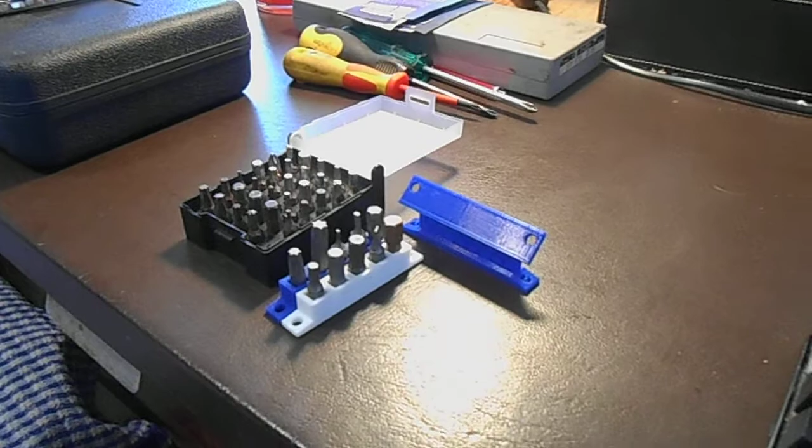Now all I'm saying is people say things like, oh, I could do that, but I haven't got the time. With 3D printing, time is the commodity. Time is what you have to spend, because time is experience.

Getting 2 extruders to work is going to take you ages. You've got to figure out how to... I've burned a whole roll in 1 week. And you might think that's not much. That's huge. That's a huge amount of printing.

See these 2 bottom boxes? They're full of models. Both of those big ones at the bottom, the one with the black base and the one above it - the one above it's only about quarter full, but the bottom one is chockers with little models. Every one of them's 4 hours, 8 hours. This big one here, they took 10 hours. This one here took about 5 hours.

Now I'm not trying to deter you, I'm trying to educate you. If you're in Australia and you're doing 3D printing, they'll have you believe they're giving you all these huge models, and they're making out like, oh yeah, just get on there and knock them out. You know, print yourself a Ferrari.

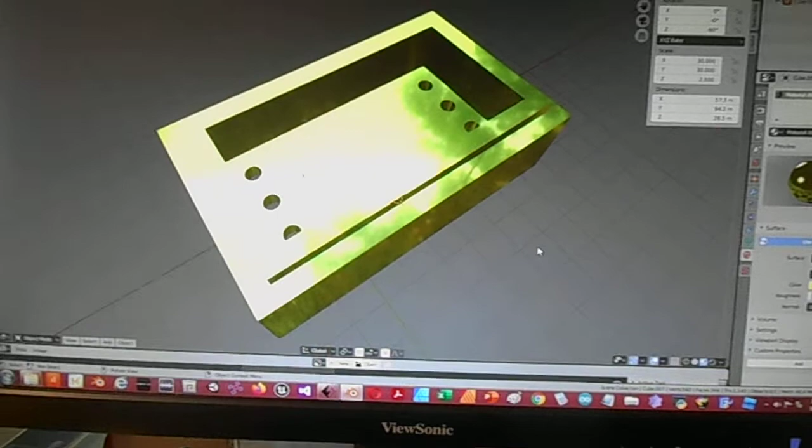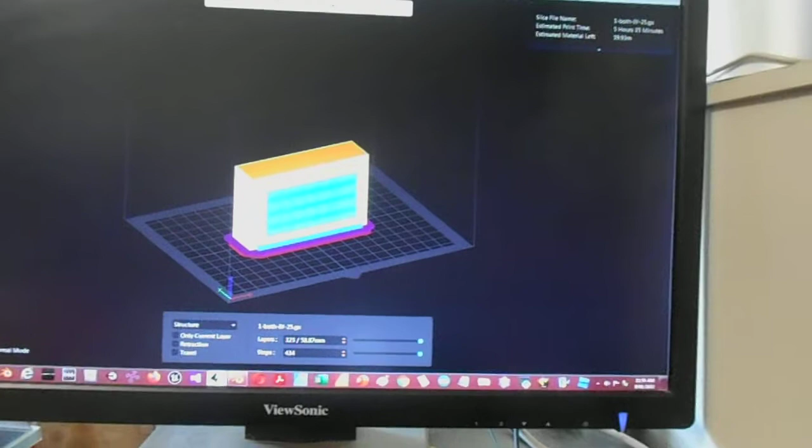Oh, for God's sake. Now, I see this one here, that takes 30, right? So I made a little 15, which is 3 of these. 3 of these little ones, without the backing plate, right? So I thought I'll just make a little one. So I designed this. Right, there you are there. Little 3 one, little tiny one, right? This is the print time. It says 5 hours and 35 minutes. 5 hours! 5 hours! So my point is for the last 2 weeks, or last week, I've been doing printing non-stop, and I'm making huge headway here, but...

You might say, oh well, I'll just design it better and just print it all. You can't, because every single solitary dimension has to be down to the millimetre. You make one mistake, you get it out by 1 millimetre, you can't get the screw in. You can't file it because the plastic melts. That's it, and that's even if you're only working in PLA. If you're working in ABS, it's even harder.

So what I'm trying to say here is, aside from the fact of buying a professional printer, I'd highly recommend getting a professional printer, because when you start doing this stuff and you start making real things, these things can catch fire. One model there took 12 hours to print, and that seems to be the norm with this - if you're going to print anything of any reasonable size, it's going to take you 10 hours.

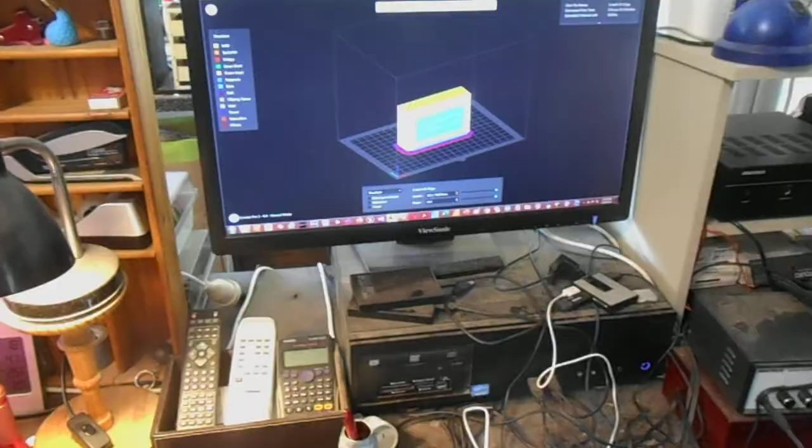I'm watching TV, my TV's there. The printer's here, my computer's here. It's perfect - I'm sitting right smack in the middle of it. So when I'm using the computer, I can see the 3D printer. When I'm watching TV, I can see the 3D printer. When I make a cup of coffee, I can see the 3D printer.

Because you've got to keep a goddamn eye on it all the time. If it goes up in flames, that's not a good idea. Buying a new house because this one burned down adds a little bit to your expenditure. It's highly not recommended, so you really need to keep an eye on this.

So you need glass doors, and it's got to be soundproof because it makes a buzzing noise, especially if you're running dual extruders. I highly recommend getting duals, because it really saves a huge amount of time - it halves your time.

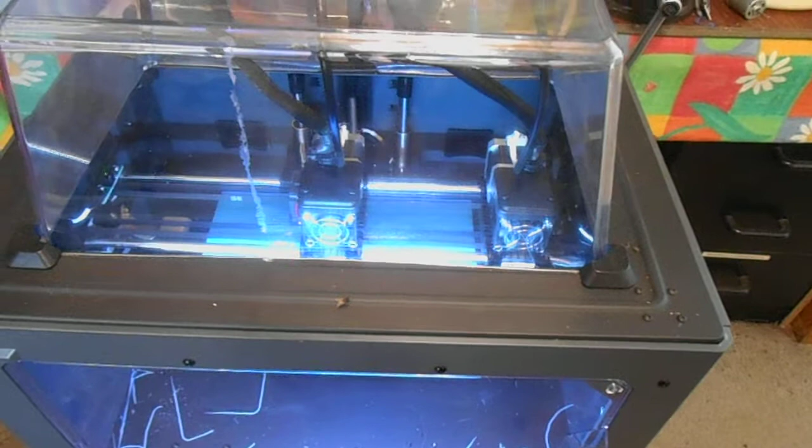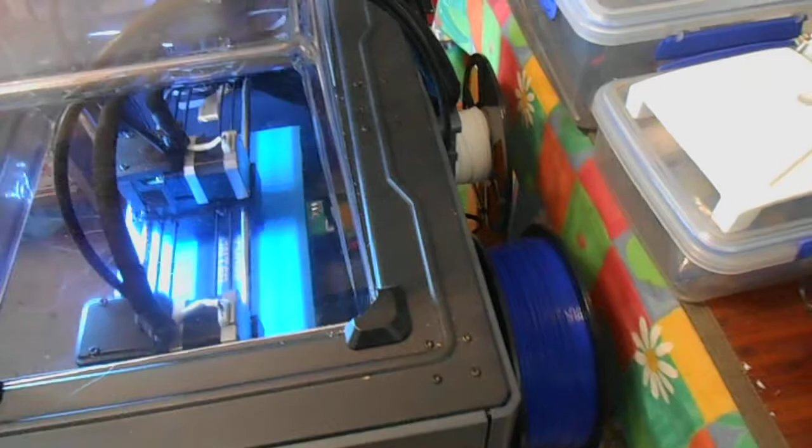The only thing I'm a bit miffed about is when I got it to work, it did one extruder, moved over, and then used the other one individually. I don't even know whether they can run at the same time - I'm a bit suspicious about this. But it does give you two rolls of filament to use on a job, which is really good, meaning you can make very large jobs. It's handy - you've got twin filament, twin extruders, and twin reels. You really burn up a lot of extrusion material when you start doing this stuff.

But you need a little room about the size of a toilet, interconnected with your lounge. You need to see it from the kitchen, you need to see it from the lounge room, you even need to be able to keep an eye on it from your bedroom. You need to view it anywhere in your house because it's going to be running for days at a time - you need to see if anything's going wrong.

You can go in there and turn it off. I'd even go to the point where, if you're going into your bedroom to sleep and you're a bit worried about it, you pause it and then come back and turn it back on in the morning when you wake up. You can do that apparently with these things and it'll resume printing - but boy oh boy, you're going to spend a lot of time doing this.

You need to get your head around the time frame of this. This particular little thing is going to take a while, and all this is just the bottom part of it. That's only for 3 - that's only going to hold 15 of these.

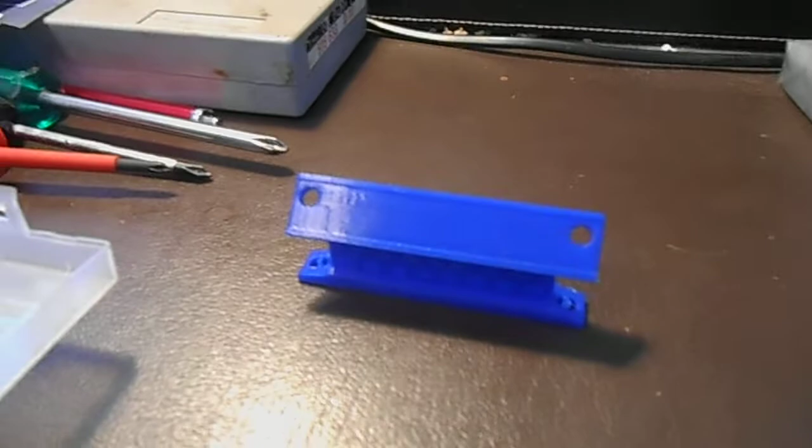I want it to have a little bay at the bottom so you can put little odds and sods in there, and a couple of little drawers in the bottom of it. I also want to put labels on these things - this is the more advanced version, it'll have labels on it. But boy oh boy, the time I'm going to be spending doing this.

It's incredible technology - it's where high tech is at. If you're designing your own house, you need to have a little room where you can do what I'm doing here, looking right at it. I mean, I've got the ideal situation here. But to get what I've got, even though I didn't buy it all myself, I bought the...